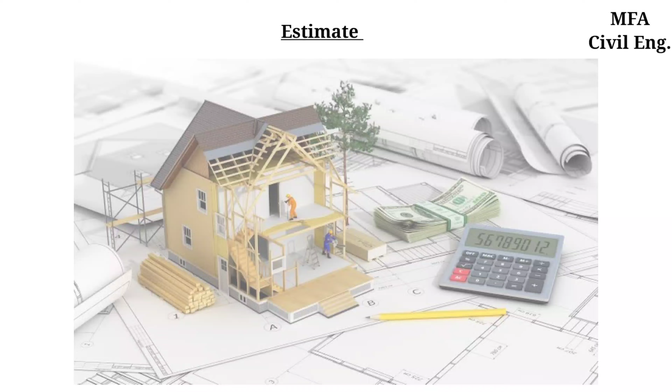Today we are going to learn about what is estimate, the purpose of estimate, and the different types of estimate that are prepared in the construction project. So without wasting any further time, let's get started.

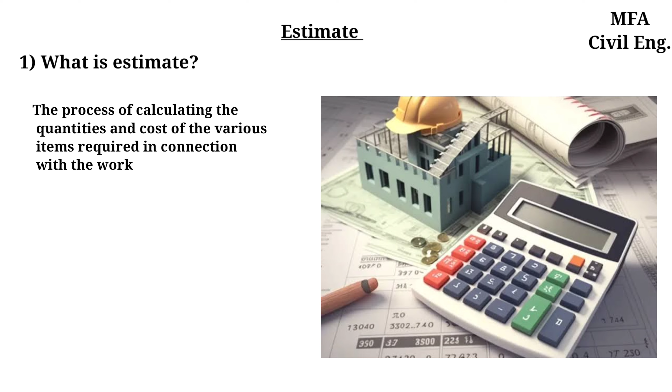The estimate of any construction work may be defined as the process of calculating the quantities and the cost of the various items required in connection with the work. It is prepared by calculating the quantities from the dimensions on the drawing for various items required to complete the project and multiplying by the unit cost of that item.

To prepare an estimate, drawings consisting of a plan, elevation and section that represent the important points, along with a detailed specification giving specific description of all workmanship, properties and proportion of materials, are required.

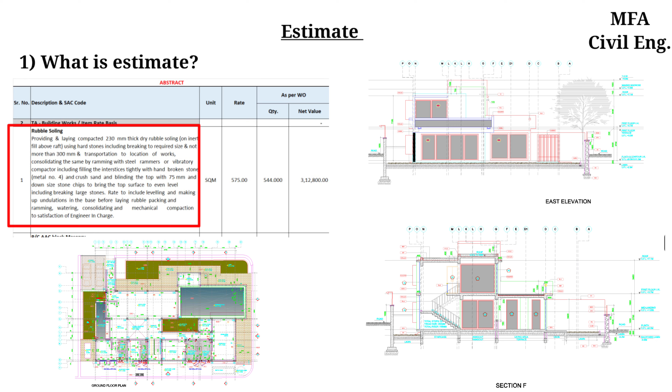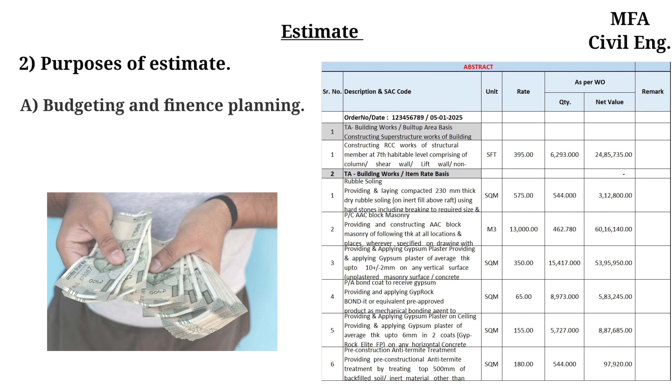Estimates are prepared for various purposes like to calculate the necessary amount of money required by the owner to complete the proposed work. For public construction work, estimates are required in order to obtain administrative approval, allotment of fund, and technical sanction.

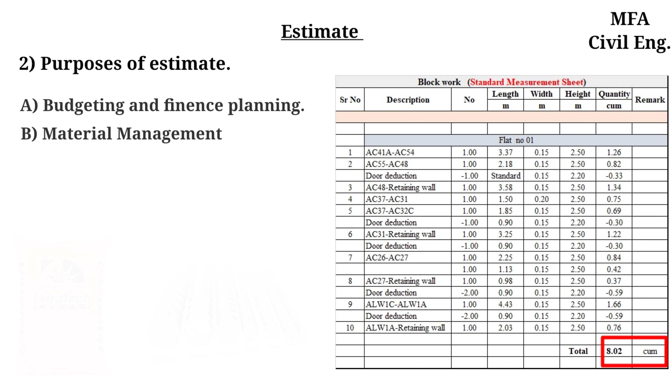To calculate the quantity of material required in order to program their timely procurement. To procure controlled material if any, like cement, steel, etc. Quantities of such materials are worked out from the estimate of the work and attached with the application for verification. To calculate the number of different categories of workers that are required to be employed to complete the work

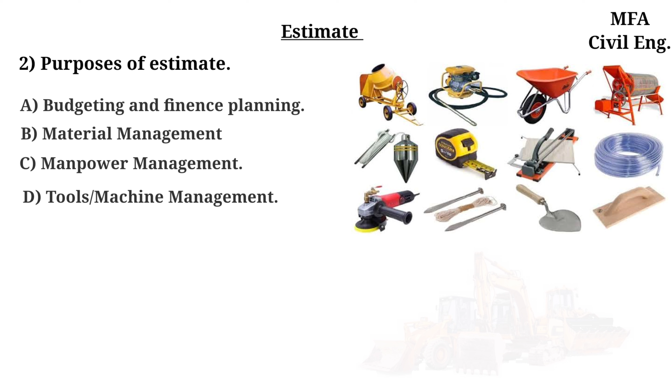within the scheduled time of completion. To calculate the requirement of tools, plants and equipment required to complete the work according to the program. To fix up the completion period of the volume of work involved in the estimate. To draw up a construction schedule and program, and also to arrange the fund required according to the programming.

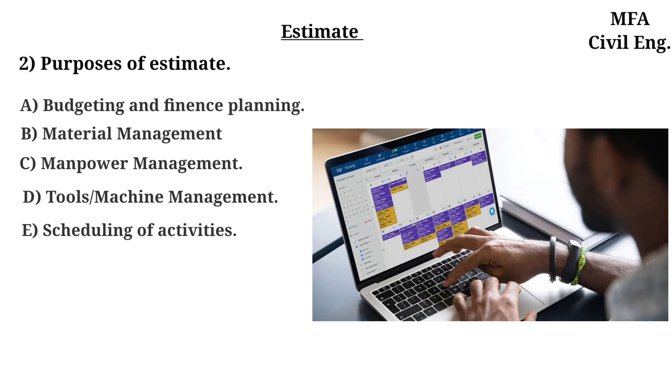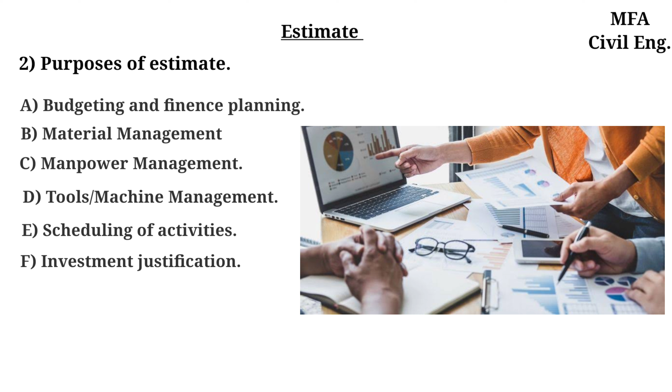To justify the investment from benefit cost ratio. For ideal investment, this ratio should be more than 1. To invite tender and prepare bill for the payment. And an estimate for an existing property is required for the valuation.

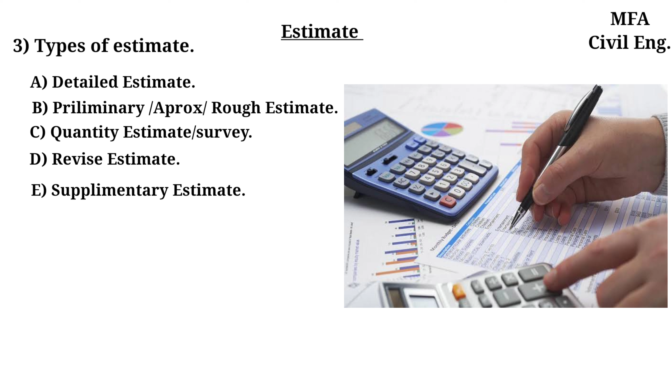Let's see the different types of estimates that are used in construction. These are a detailed estimate, a preliminary or approximate or rough estimate, a quantity estimate or quantity survey, revised estimate, supplementary estimate, complete estimate, and annual maintenance or repair estimate.

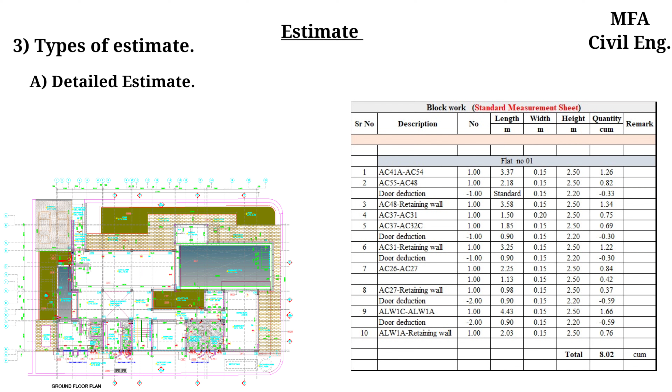Let's see each type of estimate in detail, starting with a detailed estimate. This includes the detail particularly for the quantities, rate and cost of all the items involved for satisfactory completion of the project. Quantities of all the items of work are calculated from their respective dimensions on the drawing on a measurement sheet, multiplying these quantities by the respective rates in a separate sheet.

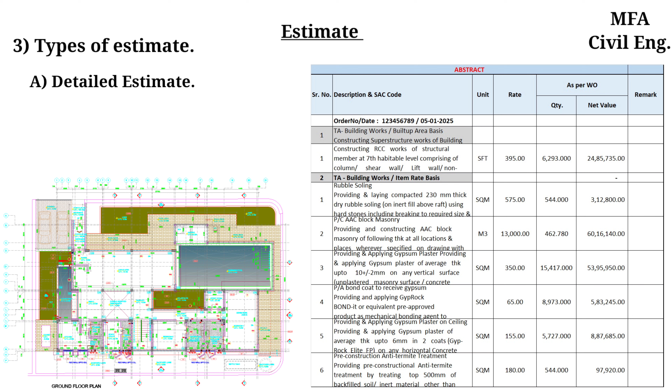The cost of all items of the work are worked out individually and then summarized. All other expenses required for satisfactory completion of the projects are added to the cost to frame the total of the detailed estimate. This is the best and most accurate estimate that can be prepared.

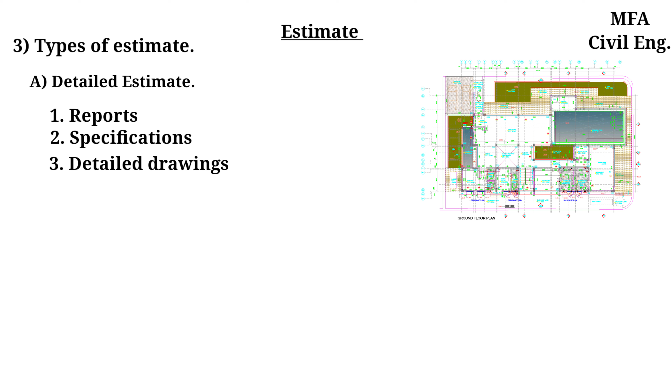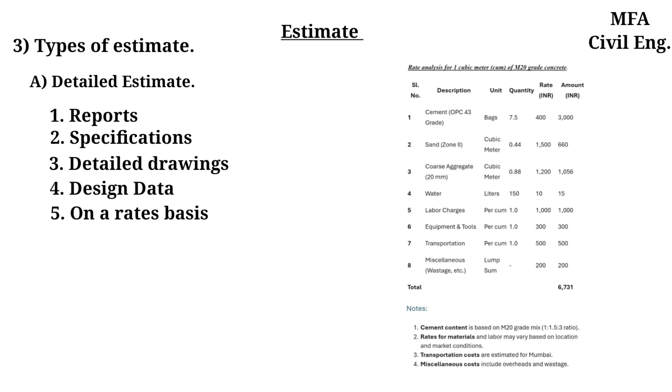A detailed estimate is prepared from reports, specification, detailed drawings that show plan, elevation and different sections, key or index plan, design data and calculation, and the basis of rate adopted in the estimate. Such detailed estimate is prepared for technical sanction, administrative approval, and also for the execution of the contract with the contractor.

A preliminary or rough estimate is an approximate estimate to find out an approximate cost in a short time, and thus enable the authority concerned to consider the financial aspect of the scheme and accordingly sanction the amount for the same. Such an estimate is formed after knowing the rate of a similar work and from practical knowledge

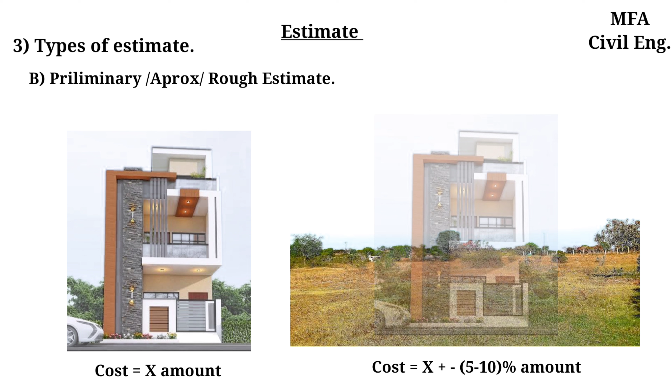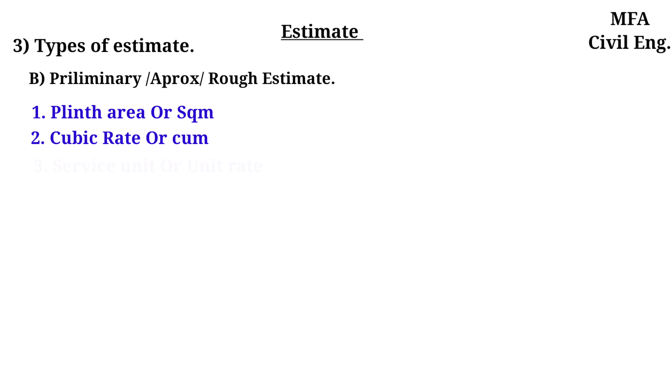in various ways for various types of work such as plinth area or square meter method, cubic rate or cubic meter method, service unit or unit rate method, bay method, approximate quantity with bill method, cost comparison method, and cost from material and labor.

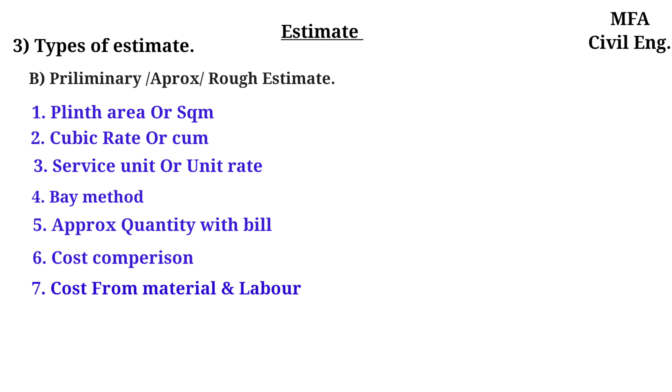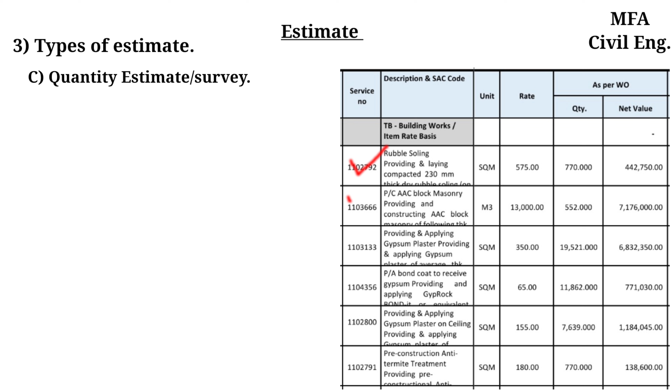A quantity estimate or quantity survey is a complete estimate or list of the quantities for all items of work required to complete the concerned project. The quantity of each item is worked out from the respective dimensions on the drawing of that structure. To find the cost of an item, its quantity is multiplied by the rate per unit of that item. The purpose of a bill of quantity is to provide the complete list of quantities necessary for the completion of any engineering project.

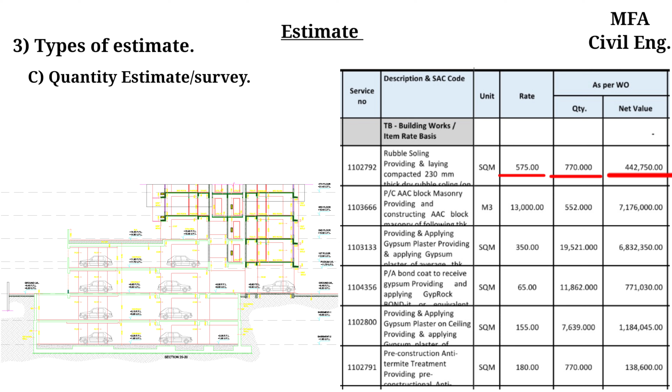A revised estimate is a detailed estimate for the revised quantity and rate of items of work originally provided in the estimate, without material deviation of a structural nature from the design originally approved for the project. It is prepared with a comparative statement in abstract form showing the probable variation of quantities, rate, and amount of each item of work as compared with the original estimate, side by side, stating the reason for the variation. A revised estimate is prepared and submitted for fresh technical sanction.

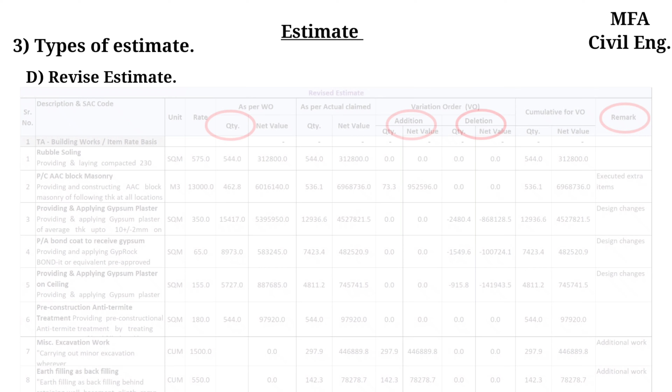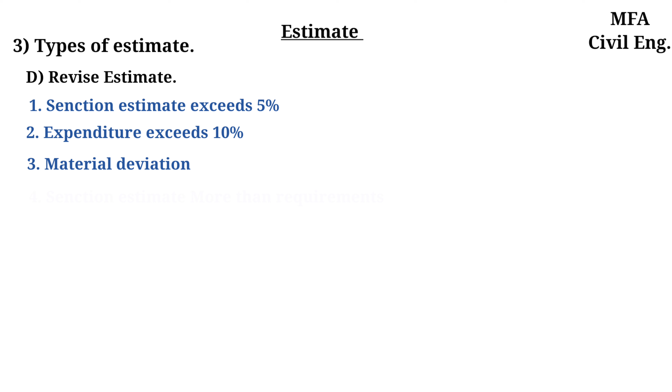It is required for various reasons, such as when the sanctioned estimate is likely to be exceeded by more than 5%, either due to rates found insufficient or from any cause except important structural alteration; when the expenditure of the work exceeds or is likely to exceed the administrative approval by more than 10%; when there is a material deviation from the original proposal but not due to material deviation of a structural nature; and when it is found that the sanctioned estimate is more than the actual requirement.

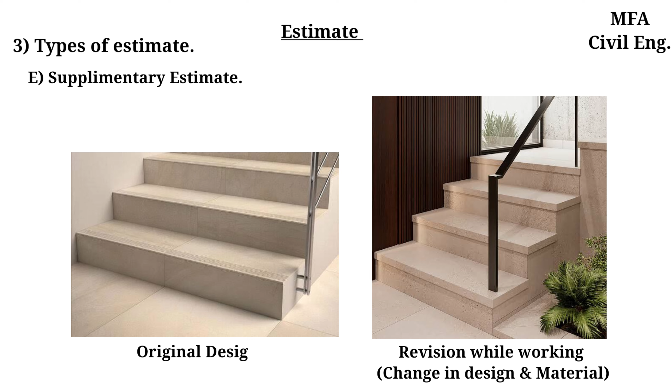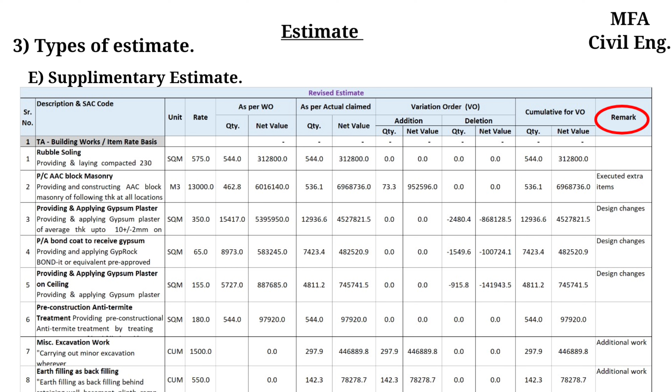A supplementary estimate is required when, while work is in progress, some changes or additional work arise due to material deviation of a structural nature from the design originally approved. The method of preparation of a supplementary estimate is the same as that of a detailed estimate, and it should be accompanied by a full report of the circumstances which render it necessary. The abstract must show the amount originally estimated and the total sanction required, including the supplementary amount.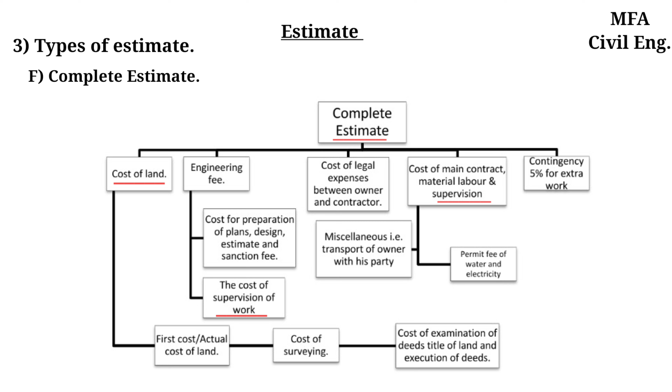Annual maintenance or repair estimates are prepared after the completion of the work. It is necessary to maintain the structure for its proper functioning. Items which require renewal, replacement, repair, etc. are included in the form of a detailed estimate.

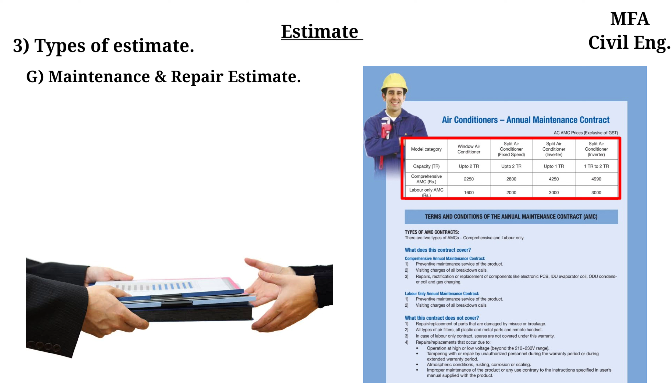For buildings, items of work such as white washing, color washing, and painting of doors and windows have their quantities based on previous measurements recorded in a measurement book, known as a standard measurement book.

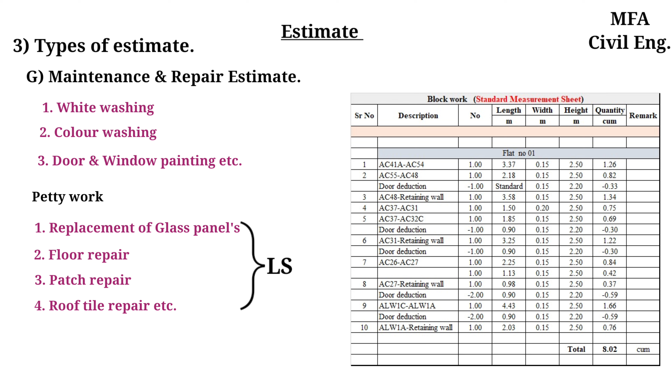For petty work such as replacement of glass panels, repair of floors, patch repair to cement plaster on walls, and changing of roof tiles, or similar work whose repair cannot be estimated in advance, only a lump sum provision is made for that item in the estimate.

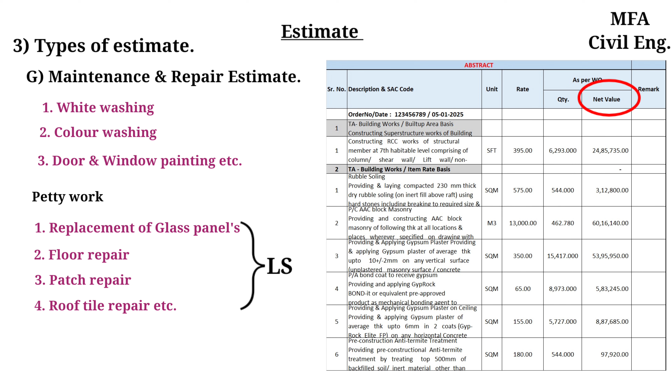An idea of the amount to be provided is taken from the actual expenditure incurred during the last year. The total estimated cost of maintenance of the structure is generally kept within a prescribed limit, based on a percentage of the cost of construction of the structure and its importance.